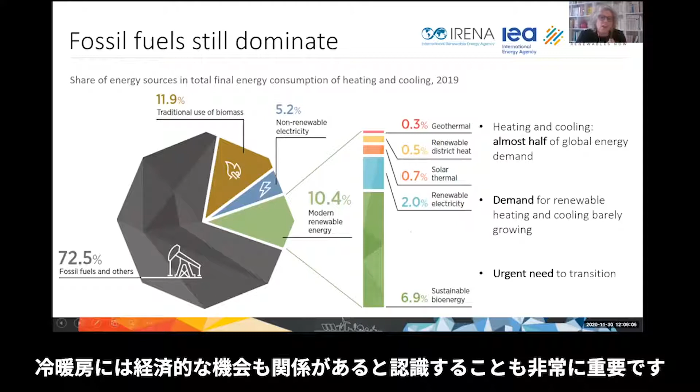What is also very clear is we have in these sectors a large part, 11.9% of the demand, being covered by traditional use of biomass. And here we do not only have environmental implications, but also social and economic implications, which are really important to address, especially in developing and emerging countries, with major health impacts and social impacts. The key sectors where heating and cooling occurs are, as I mentioned, industry, buildings, and to some extent agriculture. And I think here it is very important to also see that there are economic opportunities linked to this. So next slide, please.

It's very clear that we need an urgent transition in these sectors, and climate and sustainable development are not the only drivers for this. And I think this is extremely important to underline, especially when we have decision makers, policy makers that need to be convinced of the role of renewable energy outside of our energy bubble or ecosystem, I would say. It is about improving air pollution and related health impacts, obviously greenhouse gas, creating local jobs and local economic development. And I think this is really key, because when we're talking about heating and cooling, we're very often talking about local markets too, and local market structures and local jobs as a result. Reducing energy poverty and also strengthening energy security.

I take the example of the Netherlands, for instance. They have clearly engaged also in the development of efficient and renewable heat to ensure energy sovereignty and cover their demand here with local resources. Obviously, also the other part is universal access, because we still have 2.4 billion people relying on traditional biomass. Next slide, please.

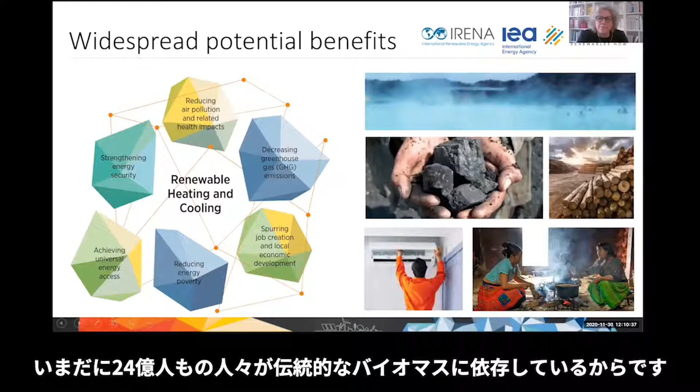Why is the uptake in renewable heating and cooling not happening, or not happening quickly enough? The reality is that we do have barriers which exist at different levels, from the political institutional barriers down to end users' decisions. There is clearly a lack of political commitment. I'll come to this later. Policy frameworks are still built around fossil fuel-based energy systems. And the reality is, in an ecosystem which relies so heavily on fossil fuels, this is obviously a barrier, considering the fact also that subsidies for fossil fuels still persist. Now, transitioning out of it needs to happen, needs obviously also to happen by taking into account the social consequences.

Other challenges are economic and financial barriers, which is a key problem. The capital cost in renewable-based heating and cooling is higher than we would encounter with fossil fuel, and we are not on a level playing field.

Plus, it's also the structure of the ecosystems. Differently than renewable power, for instance, where we have a strong supply voice and industry, in heating and cooling we have structures which are much more decentralized. There are also questions of workforce.

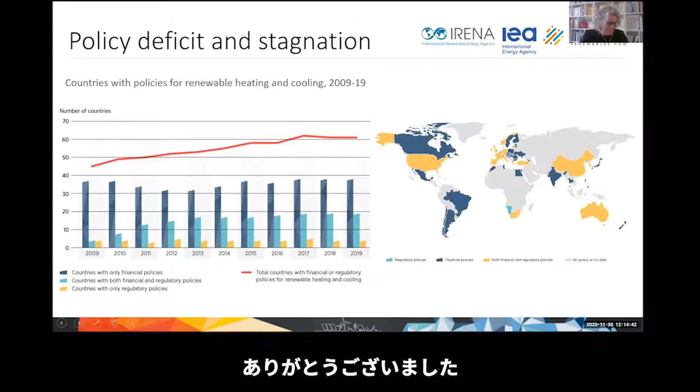Let me give a little bit more input on technology transformation pathways, the barriers they face, and examples of policy solutions. Let me start with electrification of heat.

I will mention two in particular. One is the high upfront cost of appliances, notably for heat pumps. This is typically addressed in many countries through capital grants, subsidies, loans, and rebates. This is a typical policy instrument.

Another barrier, which is more complex but can be very important, is high operational costs linked to tariff structures. In some countries, there are high retail electricity prices, not necessarily because of high wholesale electricity prices, but because of taxes, levies, surcharges, sometimes even feed-in tariff surcharges. This becomes a very important barrier for heat pumps' competitiveness with fossil fuels. To address this, some countries have introduced special electric heating tariffs for eligible high-efficiency devices, as in the case of the UK renewable heat incentive system.

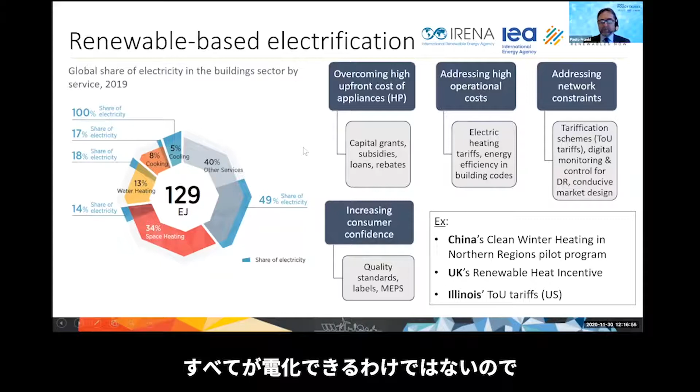Complementary to electrification, there are of course renewable gases, as not everything can be done with electricity. They include biogas, biomethane, as well as renewable hydrogen. Around 50% of biogas is used today for cogeneration, commercial heat and buildings, and another 11% is upgraded to biomethane that can be directly injected into existing gas infrastructure. If you look at costs, in some cases biogas can be competitive with fossil fuels, particularly if it comes from waste. However, more generally, policy instruments are needed to close the cost gap with fossil fuels.

Now, this includes, for instance, renewable gas injection subsidies, as in the case of Denmark, which has another important policy instrument, which is targets. Denmark has a target of 100% renewable gas injected into the grid by 2035. France has 10% by 2030.

Another important aspect I would like to mention is evaluating in monetary terms the avoided methane emissions that would otherwise naturally occur. There is a very good example of a policy for that: the California Low Carbon Fuel Standard. In this case, the economics of biogas and biomethane change dramatically for the better.

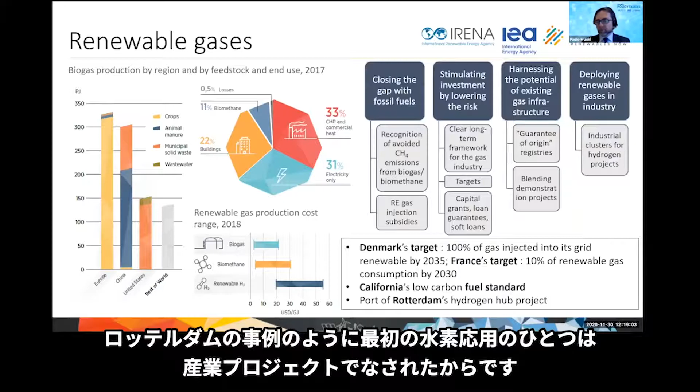My last point is on renewable hydrogen. This is more expensive, but has also a much higher value. I will not spend too much time on this. On renewable hydrogen, there are full of workshops, and there is an unprecedented momentum for that. But I would like to put attention on one policy instrument, which is to look at policy supporting industrial clusters, because one of the first applications of hydrogen is in industrial projects, like in the case of Rotterdam in the Netherlands. Next, please.

Now, biomass. Biomass, I repeat, is always the overlooked giant of renewables. It's really dominating: 70% of total renewable heat today comes from biomass, and the modern, sustainable biomass, 50% of total renewable final energy demand.

Now, on this, I would focus on two aspects. One is dedicated measures to address cost and market barriers, and the examples are in Europe, like Italy's Conto Termico, France's Fonds Chaleur, and also dedicated loans and grants in huge developing economies like Brazil, giving loan support for biomass CHP, or India, with a very interesting grant scheme for industrial scale biomass cogeneration.

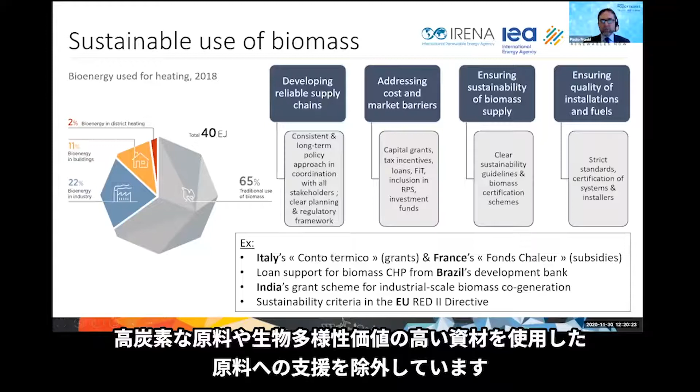The second aspect is, of course, sustainability. Biomass can and must be sustainable. For that, you have to have clear, transparent sustainability criteria. One example is the one for heat in the European Union RED II directive, which requires minimum levels of life cycle emission benefits and excludes support for feedstock produced with high carbon stocks or biodiversity value. Next slide, please.

The deployment is promoted through a mix of targets, subsidies, and mandates. I would note here the combination of grants, fiscal incentives, and preferential loans also in Africa, in Tunisia and Rwanda, for instance, and in the Middle East, in Lebanon. Solar thermal can contribute also to district heating, maybe preheating, not completely at the level of the highest heat. This is an interesting example in Denmark, where the main driver is high fossil fuel taxes on competing fuels.

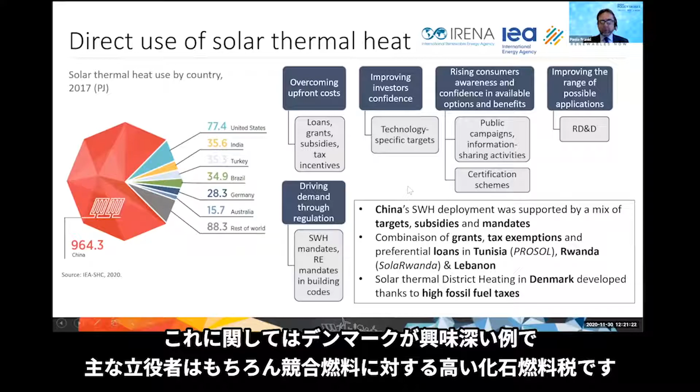And my last slide, last but certainly not least: geothermal today is only 3% of total renewable heat, but with a great potential and growing very, very fast. Overall in the world, the main producing country is again China. Most applications are in buildings, but an important fraction also in agri-food industry, agriculture and forestry, and industry in a few cases, like New Zealand and Iceland, also in industry.

Now, a specific barrier for geothermal is, of course, the de-risking of geothermal exploration. Here I would like to focus on the really interesting case of the Netherlands, which has the fastest growing market in Europe, with a holistic plan for the applications of geothermal, including in horticulture, giving a general master plan, providing public data on geological resources, providing insurance schemes when things go wrong. It is included in the general sustainable development subsidies, but it also has a feed-in premium for renewable heat, with a venture program collaboration between government and industry.

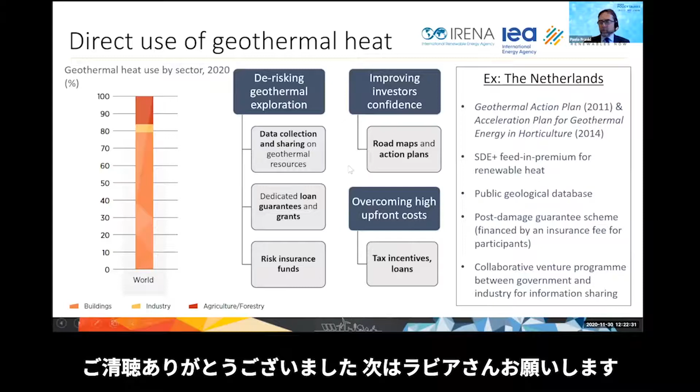So in the 5 pathways that were just presented by Paolo, our analysis also demonstrates the great potential in providing solutions to the billions of people still lacking universal access to clean, affordable, reliable energy for heating and cooling services. I'm just going to name a few examples: efficient cook stoves and bioethanol cooking fuels for billions of people that still rely on biomass for their cooking needs, which can obviously reduce indoor pollution and drudgery. As you know, these have affected women and children in a disproportionate manner.

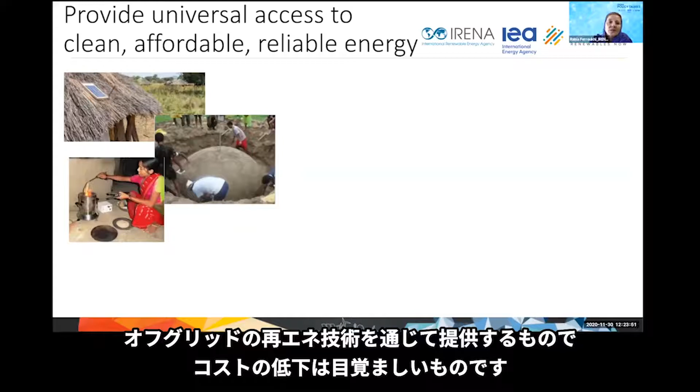So the second one is the small-scale domestic biogas digesters. They currently serve 125 million people and provide additional benefits through better sanitation and waste management. Another example is electrified heating and cooling services, which can be provided through off-grid renewable energy technologies, especially given their falling costs.

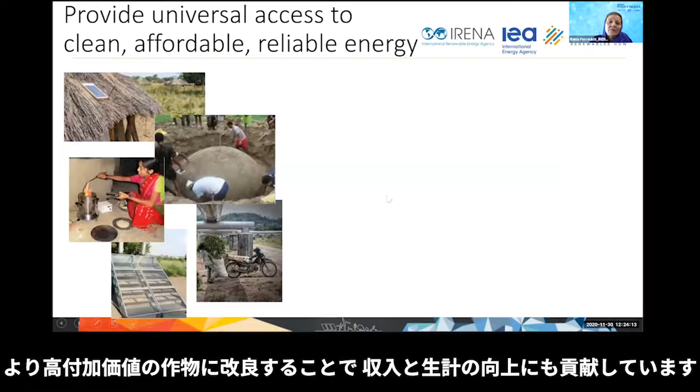Last example is solar thermal and geothermal, which offers agro-processing services and helps smallholder farmers conserve their produce and transform them into more valuable products, increasing their income and livelihoods.

What is important to understand is that these benefits can be realized by establishing a supporting ecosystem, which should include access to finance, de-risking tools, a conducive ownership model, efficient technologies that cater to specific needs, awareness raising on available solutions, skills to distribute, install, and maintain those applications, access to new or existing markets to sell the products, and integrated resource planning as part of national level policies and targets.

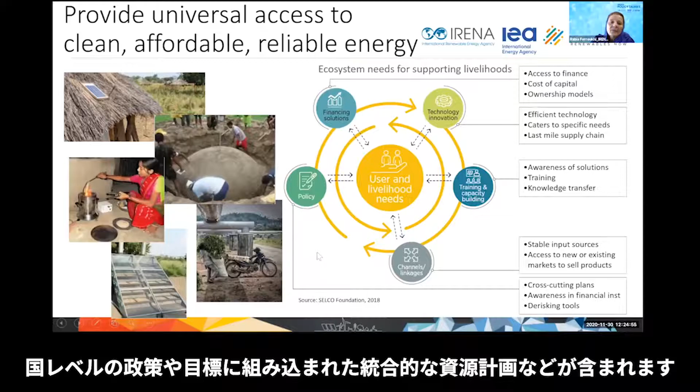So as far now as cross-cutting policies to support the way forward to decarbonize heating and cooling services in all contexts, national and subnational targets are essential. More than 12 countries and the European Union have passed or proposed laws around net zero emissions.

This includes China and the UK, and we're really happy to have with us today in our panel both countries represented, and we'll share more on the topic.

Net zero targets are not immediately feasible for all economies, but the ambitions expressed in NDCs, for example, which are currently dominated by the power sector targets, should be raised for sectors with large heating and cooling needs.

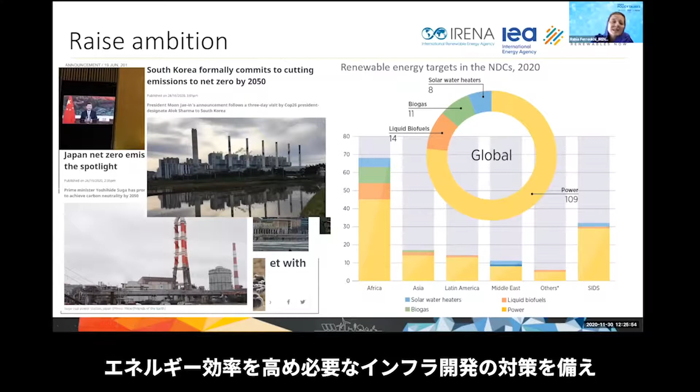Then the national targets that are established need to be translated into long-term integrated energy plans that coordinate the deployment of renewables-based solutions with measures to raise energy efficiency and develop the needed infrastructure. This is important to avoid conflicts between the pathways that were presented here, and also to avoid that they lead to stranded assets.

Just to give you one example, the operating lifetime of a district heating and cooling network can reach 100 years. So before investing in such a network, it's important to assess the heating and cooling demand of the covered area, by, for example, taking into account energy efficiency plans and establishing heat maps.

To attract investments in infrastructure, policymakers should ensure the presence of sufficient demand to render the investment profitable, for example, by mandating connections in new urban developments. This requires coordination with other sectors, such as building and transport.

Finally, ensuring solid institutional coordination that clearly defines roles and responsibilities and translates targets into actionable initiatives is really essential. This means that coordination between various governing bodies and stakeholders, including those responsible for and involved in energy, power, industry, agriculture and forestry, is needed.

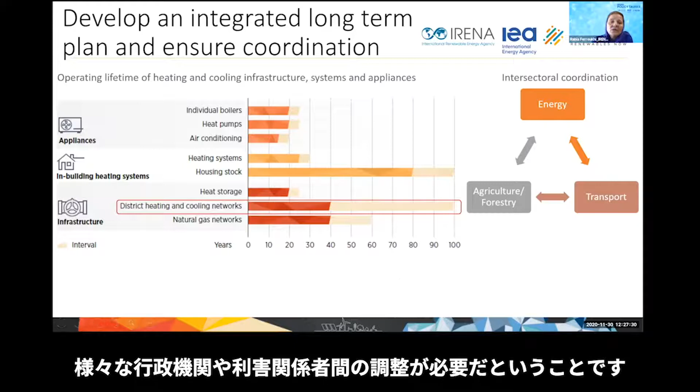As was mentioned by both Rana and Paolo, the energy transition also requires leveling the playing field with fossil fuels. Excluding the cost of externalities, hundreds of billions of dollars are currently spent on fossil fuel subsidies. Phasing them out and redirecting them toward the energy transition is key.

Where possible, policymakers should consider adjusting and implementing fiscal policies such as carbon pricing to internalize the negative impacts of fossil fuels. However, important to note is that these policies require careful consideration of broader social and equity issues, particularly for low-income populations for whom energy constitutes a larger share of household expenditures and whose budgets do not leave many options.

Generally, policy implementation should be based not only on their impact on the future energy system, but also on their socioeconomic impacts to ensure the benefits that we spoke about today are maximized and distributed equally.

Solar water heaters, for example, can substantially reduce energy bills while creating local jobs and local industry. In 2019, for example, our annual jobs review shows that the solar water heater industry accounted for about 800,000 jobs globally.

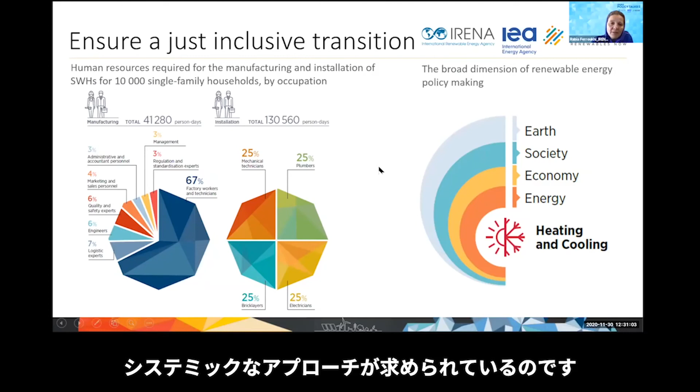A systemic approach is therefore required in the energy sector, but also in the socioeconomic systems that we have built. So I thank you for your attention on behalf of IRENA, Paolo, and I.